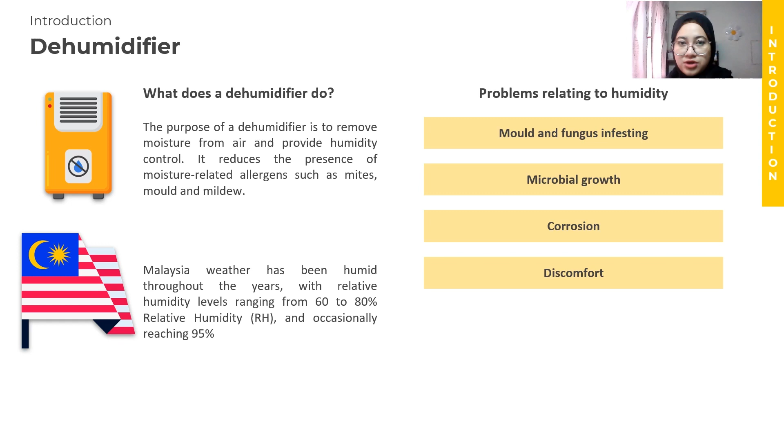In 2021, the global dehumidifier market size was estimated to be 3.78 billion USD. Furthermore, it is anticipated to grow at a CAGR of 7% from 2022 to 2030. The chemical absorbent segment of dehumidifiers is expected to account for the largest revenue share. In Malaysia, the sales volume growth increased by 50%, which translates into a 36% sales value increase.

The local market is expected to grow due to multiple key drivers such as improvement of norms and standards for managing and controlling humidity, encouraging consumers to spend more on convenience products, focus on products that improve lifestyles and living standards, the weather conditions, and rising concerns to maintain indoor air quality due to the increasing number of respiratory diseases.

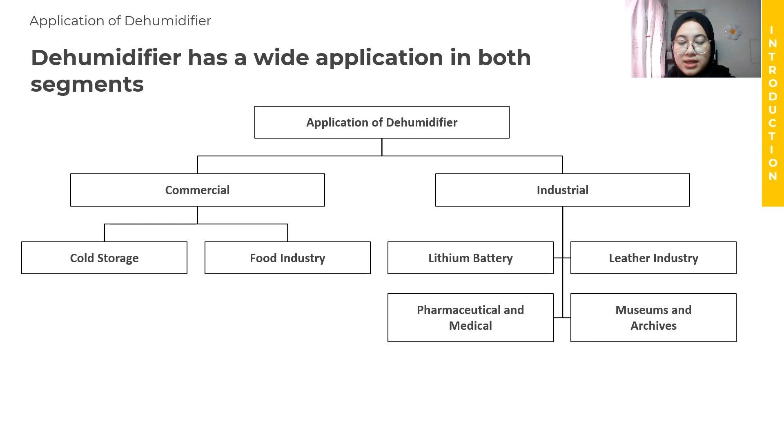The application of dehumidifiers is separated into several market segments representing commercial and industrial. The commercial is segmented into cold storage and food industry, while industrial application is further segmented into lithium battery, leather industry, pharmaceutical and medical, and also museums and archives.

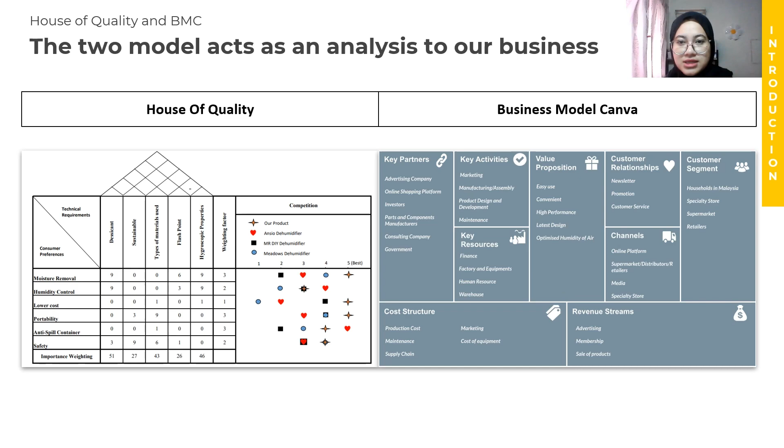Hi, I'm Xiaohui. Now I will present the product design of our dehumidifier. As the Arson Malaysia dehumidifier is a business-to-customer B2C product, there are two main attributes the product will be concerned with, which are functional and physical attributes. The table shown here is the knowledge base that has been developed on the product's performance for the development of the Arson Malaysia dehumidifier. For the first attribute, which is functional, the dehumidifier basically needs to provide comfortable air in living space and prevention of disease.

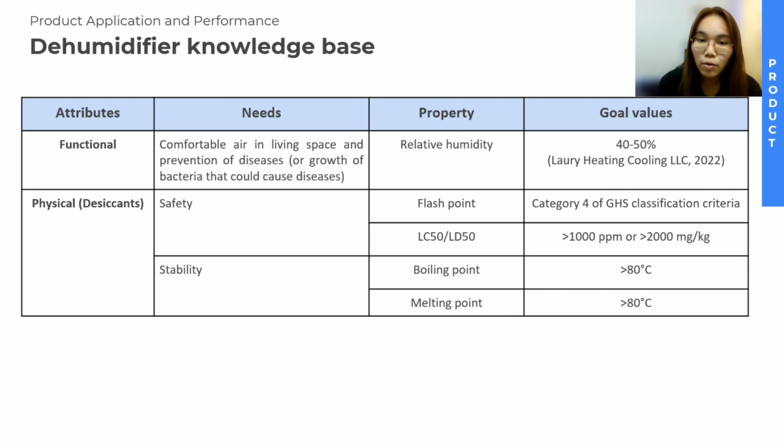The property responsible for this need is the relative humidity, which is targeted to fall in 40 to 50%. Meanwhile, for the physical attribute, there are two main needs which include safety and stability. For safety, there are two main properties in charge, which are the flash point and the LC50 or LD50. Meanwhile, for stability, we will aim for the boiling point and melting point of the desiccants to be more than 80 degrees Celsius.

There are two main mechanisms that can be used to remove moisture from the air in the dehumidifier, which are absorption and adsorption. In our product, the best mechanism for an interior dehumidifier is adsorption. Adsorption is the physicochemical phenomenon in our Arson Malaysia dehumidifier. This is because silica gel is a solid inorganic amorphous material with a high surface area and a high moisture adsorption capacity. The water molecules adhere to the surface of the desiccant because it has a lower vapor pressure than the surrounding air.

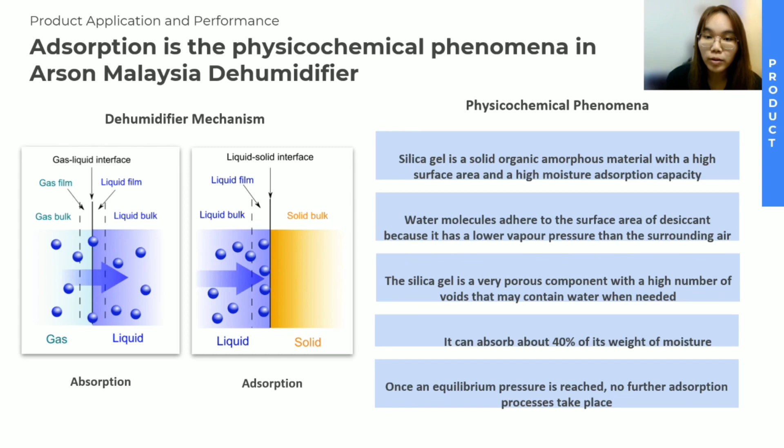Silica gel is a very porous component with a high number of voids that may contain water when needed. It can absorb about 40% of its weight in moisture. Once an equilibrium pressure is reached, no further adsorption processes will take place.

Moving on, we'll go to the desiccant selection. There are 21 listed chemicals or desiccants that have the potential to be applied in our dehumidifier design. Therefore, the goal values of the properties stated in the knowledge base table start to play a role in the design. With the first property, which is the lethal concentration LC50 value, we are able to filter a group of feasible solutions, which are calcium oxide, sodium hydroxide, sodium sulfate, and also silica gels.

Next, moving on to the second property. The flash point is important to consider when designing a safe dehumidifier. From the literature search, all of the desiccants are eligible as feasible candidates.

So next, moving on for the stability, all desiccant candidates also meet the requirement of stability of the desiccants to remain in a solid phase throughout their life cycle to avoid any disadvantage of liquids. Next, by taking the criteria of sustainability into consideration, only calcium oxide and silica gel are the final two possible candidates for the dehumidifier desiccants. So lastly, by comparing the properties and capabilities of the final two candidates, we identify the most feasible candidate to be used, which is the silica gel.

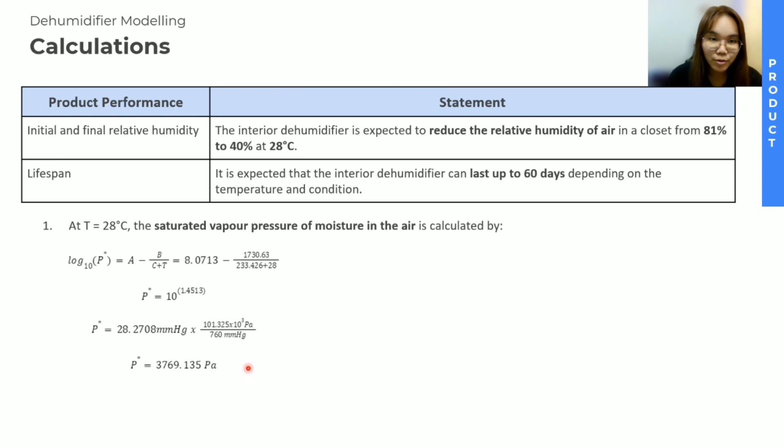So we will start our calculation by calculating the saturated vapor pressure of moisture in the air at 28 degrees Celsius. By using the formula of Antoine equation, we're able to obtain the vapor pressure of moisture in the air is equal to 3769.135 Pascal. We will continue the calculation by calculating the partial vapor pressure at 81% of relative humidity. By applying the formula shown here, we're able to obtain the initial partial vapor pressure is equal to this value. So by substituting this value into the ideal gas law equation, we're able to get the initial mass of the water in the air is equal to 59.73 gram.

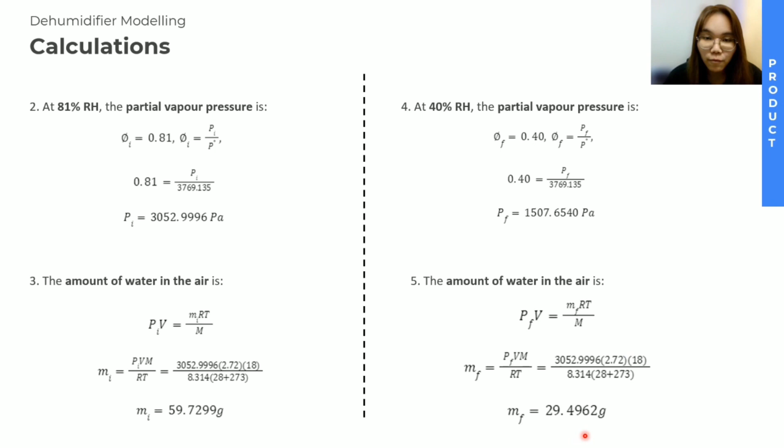Next, moving on, we calculate the partial vapor pressure at 40% relative humidity. We will obtain the partial vapor pressure, and we also will substitute the partial vapor pressure into the equation, and we're able to obtain the final amount of water in the air is equal to 29.5 grams. The equilibrium amount of moisture absorbed by the silica gel can be calculated by taking the Mi minus Mf. Moving on, the total amount of silica gel required to lower the humidity from 81% to 40% is calculated by taking the equilibrium amount of moisture absorbed divided by the desiccant equilibrium moisture content L, and the total amount of silica gel is equal to 75.58 grams.

So the height of the dehumidifier we use is calculated by using this formula, and the height is 0.1 m. Next, according to the model by Shen and Springer, the time required for a material to attain at least 99.9% of its maximum possible moisture content is calculated by using this formula, and the time required calculated for our case is 21 days. So lastly, the total amount of silica gel required for 60 days calculated is 215.94 grams.

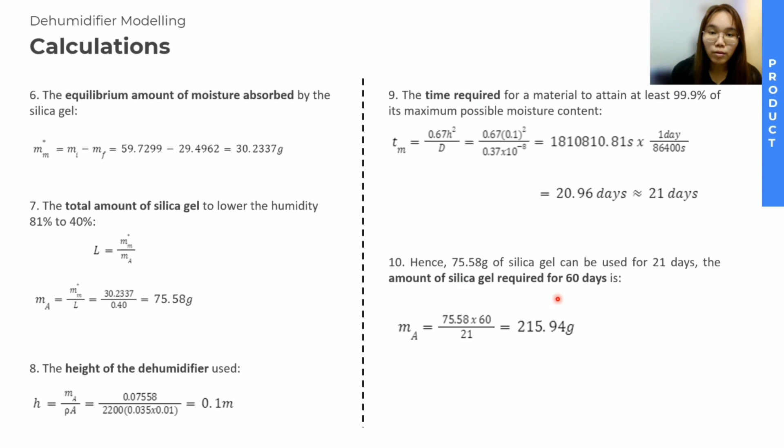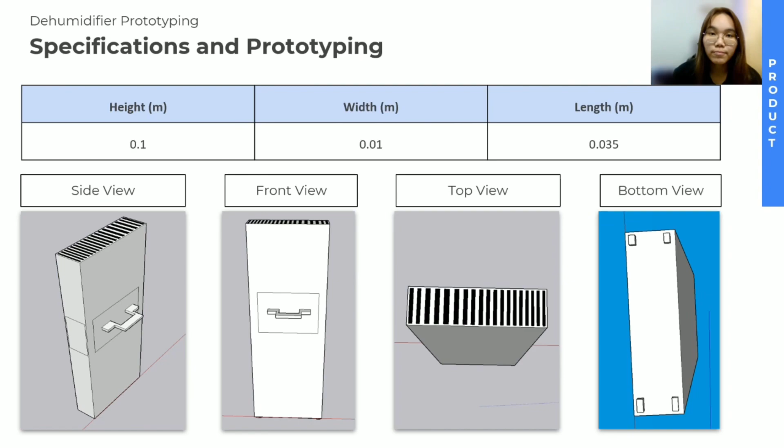Okay, for marketing is 30,000 per year. The workforce, we have 50 employees, so each will receive 48,000 per year, which is not the minimum wage, it's higher. And then the maintenance, we have 20 equipments, right? So each will cost 50,000 per year to maintain it.

Okay, the next is the capital. We have 20 equipment, so we have to buy 20 equipments, and each equipment will cost around 500,000. So next is the salvage value. To make this case much more realistic, we added salvage value. The salvage value is expected to be 4.4 million.

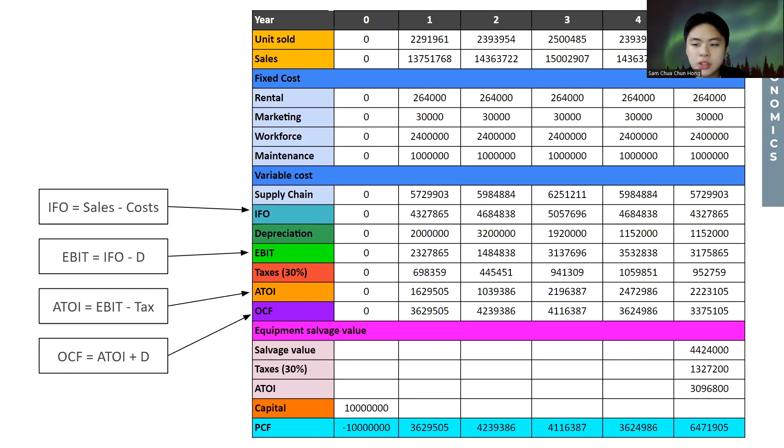So this is the summary table. We use sales, cost and all these equipments to get the values that are shown here. Then we expect the IRR, which is the internal rate of return, to be 30.9%. And the payback period is between 2 to 3 years, which is around 2.5 years.

Let's look into the sustainable development goals. Our product, Arson Malaysia dehumidifier, aims to target sustainable development goals 3, 13 and 14. Goal 3 is good health and well-being. Many people are suffering from the effects of high humidity levels such as hyperthermia and overheating as a result of our body's inability to effectively release heat, and it's expected that in future there will be an increase in those people. So the dehumidifier could help promote good health and well-being, as it helps to reduce the amount of humidity in the air, which can eliminate a musty odor, a wet area, or mold specks.

Goal 13 of the Sustainable Development Goals is climate action. A study published in Monday's Proceedings of the National Academy of Sciences demonstrated that the severity of climate change since 1980 is roughly twice as bad as previously estimated when air moisture and heat are taken into account. Additionally, Arson Malaysia's dehumidifier is made up of completely biodegradable materials, which makes it sustainable and aligns with the current market trend towards sustainability as well.